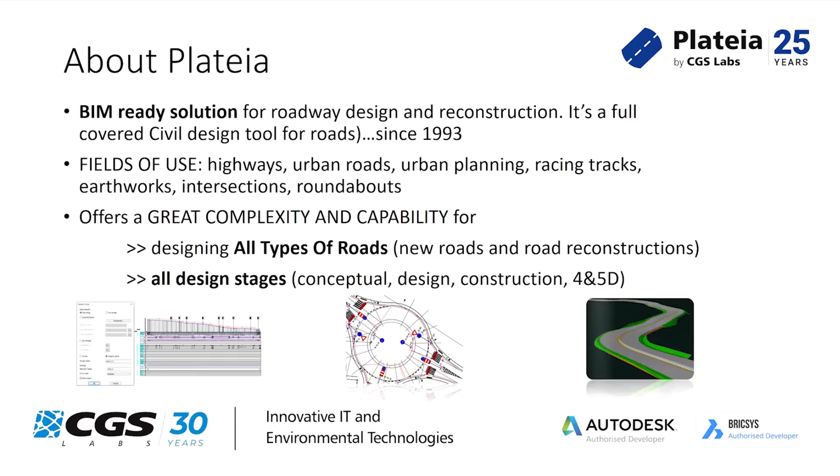So let's start with a technical presentation. At the beginning, I would like to show you a quick workflow with only 10 major steps that will take just around 9 minutes. Just sit back and enjoy.

So we see Plateia working in Civil 3D at the beginning. I will get some input data through Google Maps import. I've just selected some unknown area in Riga. I've never been there, so I don't know this area - this is just for the presentation. With a few clicks, using the right coordinate system, I got the right elevation points in my drawing and also the underlay image. So I will hide it for a second here.

In the next step, I go to layout. We define the axes that we will need here, named axis 0 and axis 1 - you will see why later. In the next step, I create the digital terrain model, which is the basis of all other steps. So with a few clicks, there is our terrain drawn here in the drawing.

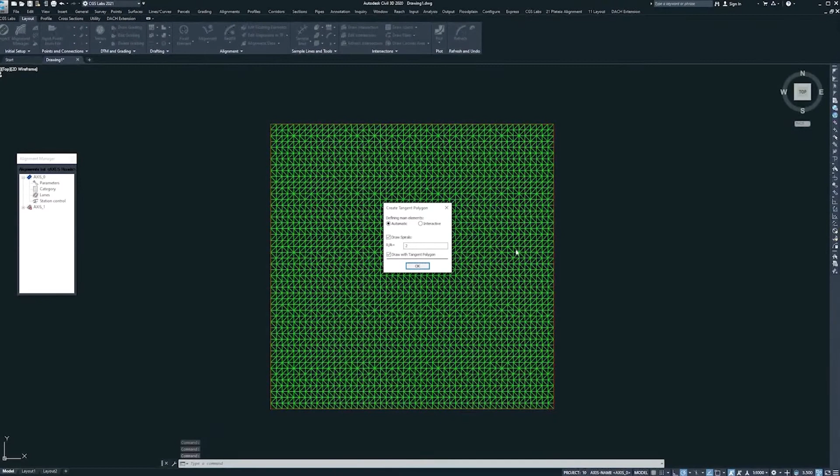So I go back and start drawing the alignment. You know those methods like tangent polygon, draw with stick, or best fit - it doesn't matter now. I select tangent polygon, but first I'll get my underlay back so you can see where it fits. So I start with the first axis, drawing it straight ahead through the first road.

The Plateia will calculate everything for me. I select the second axis, called axis 1. I go also for tangent polygon and draw a straight line through this street - I'm not sure how it's called, but you got the point. So now we have two axes here.

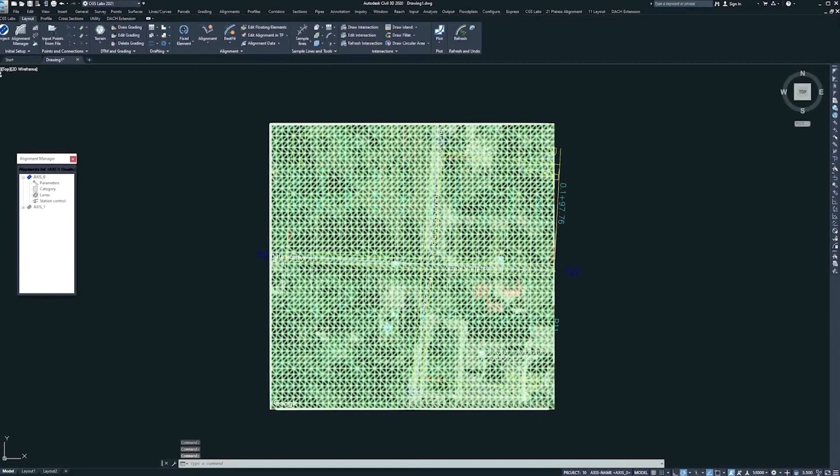I put also the sample lines which will define the later created cross sections on those lines. So for both axes I define sample lines. In the next step I drape them, so the sample lines are now in 3D, projected and draped into the DTM.

The next step is going to the profile section, which will define a table where I should define the tangent, the profile of the road. So just for example, I draw here a simple profile and calculate super elevations with a few clicks, and we got super elevations in the table.

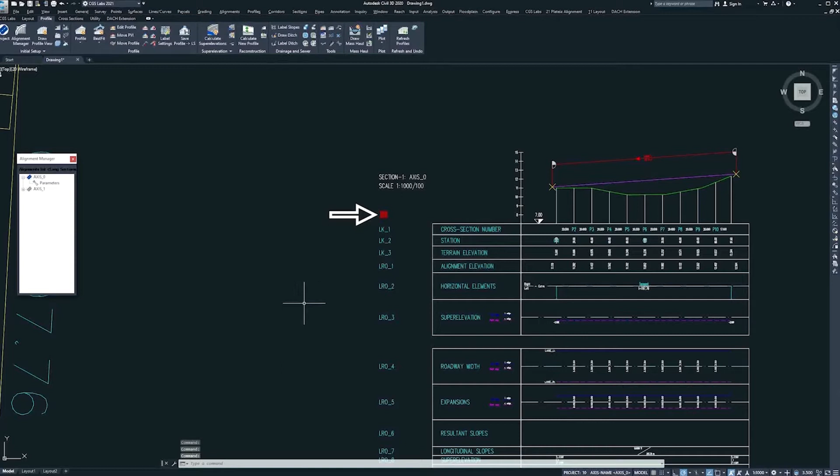I repeat this step for axis 1. I go to draw profile view, put it in my drawing, add the profile of the road - just a sample one like this - and calculate super elevations. So now I'm ready for the next step.

The next step would be defining cross sections. I have to first input the cross section tables like in the drawing, like here, but I'll put it a bit nicer, like for example here. And these are cross sections for axis 1.

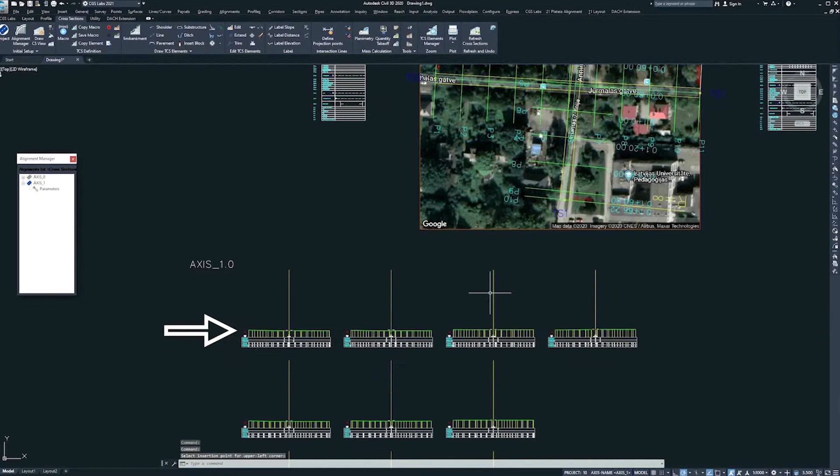You see, I have a table, I have drawn the terrain in the cross sections, and the lanes are also defined in the first step. I add here for the second axis. I select axis 1 and go for a powerful tool called macro.

That's like a subassembly library, which has predefined cross sections like here. With a few clicks, I got the geometry of the cross sections. But now I also need to define materials.

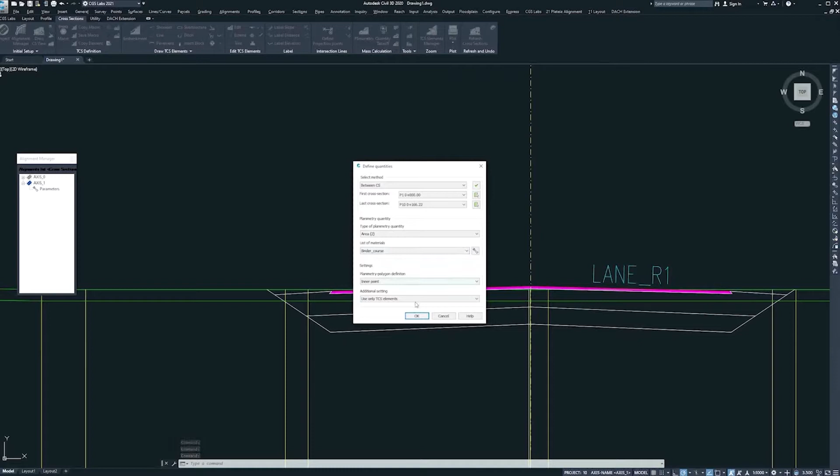So like this, it's very simple, similar to a hatch, but it's not - it's an intelligent hatch because it has some data behind it. So I define the layers of the pavement like this. I repeat once more, and the lower layer would be like base, for example, with some different method.

And like this, it's simple. I just select the edges I want to hatch. I want to define materials here. So like this - with a few clicks, I've defined the cross-sections geometry.

And I will have to repeat this for the second axis. I go for macro, which is like a script with predefined cross-sections. So I selected the same type of cross-section, and now I will repeat the steps I did before. So I have to define all materials in the cross-section.

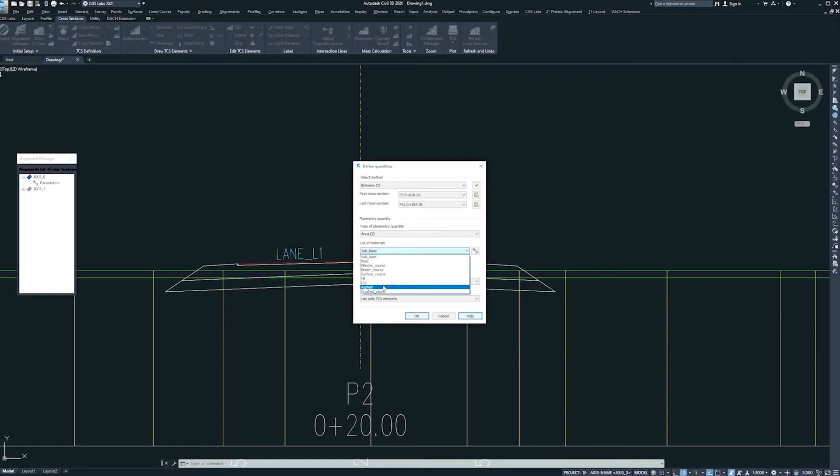I go for asphalt. I select the top edge of this asphalt, which are the lanes. The second layer would be the binder course - this is under the asphalt, the second layer - and the last one would be the base. So I go through the same procedure. I'll show the program which edges are my layer of the base, like here.

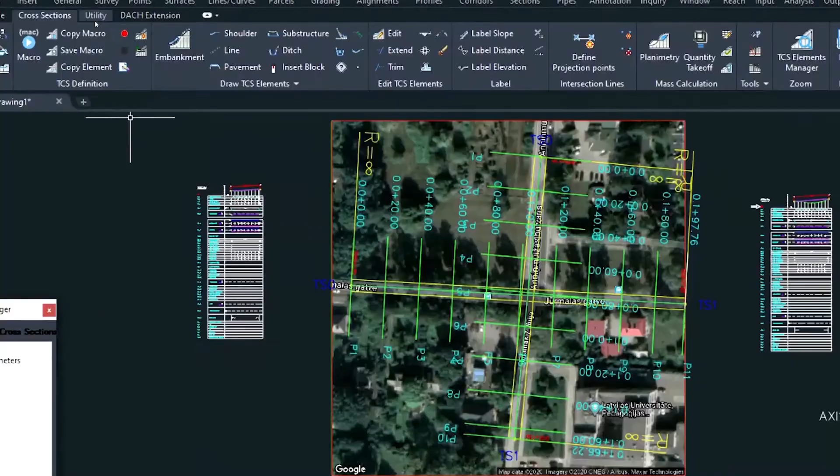And enter. So I've defined the cross sections for both axes, and the last step would be to create the BIM model just from the 2D geometry. As you saw, with a matter of one click, I got the first BIM model of the first axis, axis 0. And I will do the same for axis 1.

I click draw, and based on the predefined materials, the BIM model is created. But there's something strange, because there's no intersection between those axes.

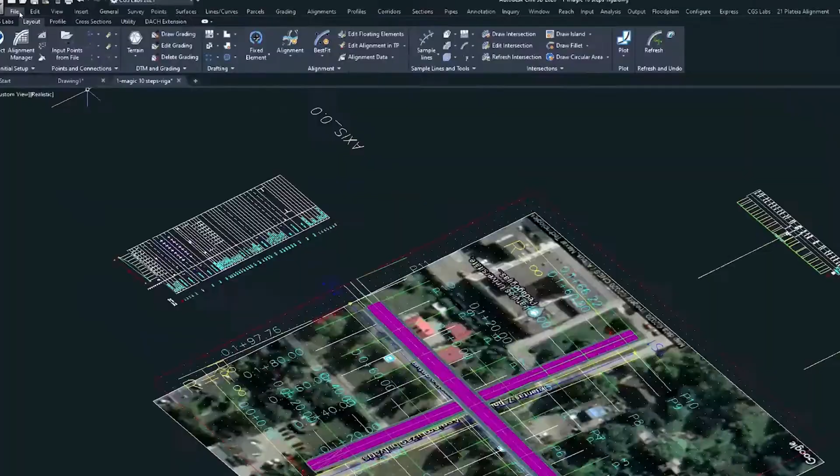So I will just hide this selection here and go back to the layout section. And there is a very beautiful command called draw intersection, which will automatically draw the intersection for us with a matter of a few clicks. I do some fine settings, not much, but I try to keep just the default as it is.

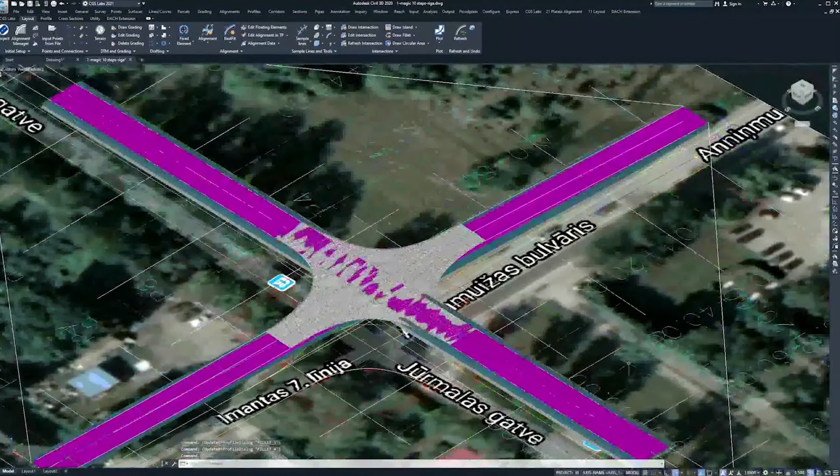And now I have to wait a few seconds while the program calculates and draws, as you see in the drawing, how everything is drawn automatically. So this is some very basic intersection created.

So I will hide this so you can see it better. So this is the whole geometry, the whole BIM geometry, the 3D model, which can then simply be exported when working on some collaboration with other designers, like on the BIM level.

So I will export everything from here. I select manually which objects should be exported into IFC - in my case, all the 3D solids of the roads and the intersections. So now let's see this in some external viewer, like BIM Vision.

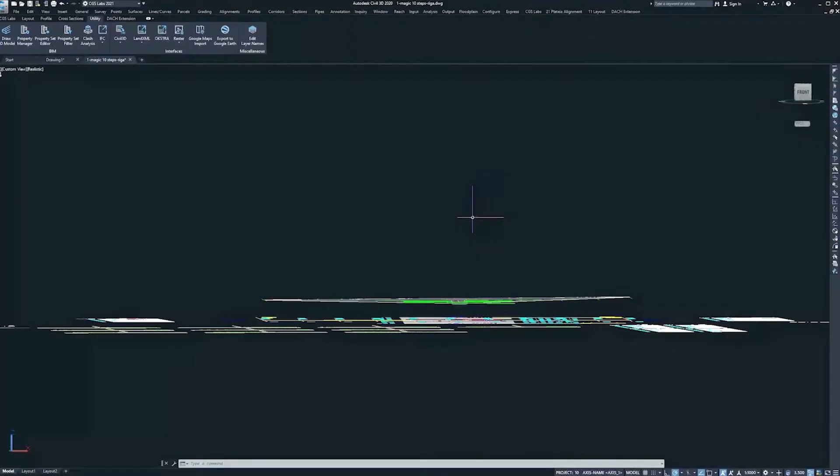BIM Vision is a free viewer for IFC. So here it is. That was the tenth step with a few detailed modifications.

Let's proceed and see a quick program structure. You saw that I went through layout, profile, cross sections, AutoSign, not here, AutoPad, not here, but through BIM also. Why not through AutoSign and AutoPad? They are standalone products that will be presented a bit later.

Here I want to share with you that we have the Plateia program divided into 3 packages. Plateia Standard will enable you to define the whole geometry with only 2D and also 3D level. Plateia Professional will add AutoSign, so you can design traffic signs and road markings. Plateia Ultimate will enable you to upgrade everything to BIM that you saw earlier, and also will add AutoPad as a standalone software, which is for swept path analysis.

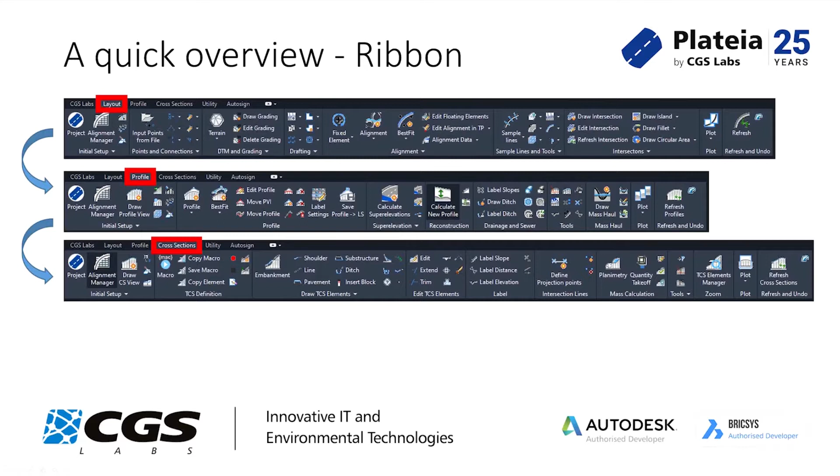Cross sections, you saw that it has a powerful command here. It's called draw macro. Macros are like predefined scripts for defining the geometry of the cross sections. So you can do everything manually from line to line, but you can also do it automatically. You define all the materials as you saw earlier.

And through defining all of those before, you can create your 3D model. You can export it through IFC. You can share it through the translator of Civil 3D, LandXML, OKSTRA, and you can also export it to Google Earth, which we'll show a bit later.

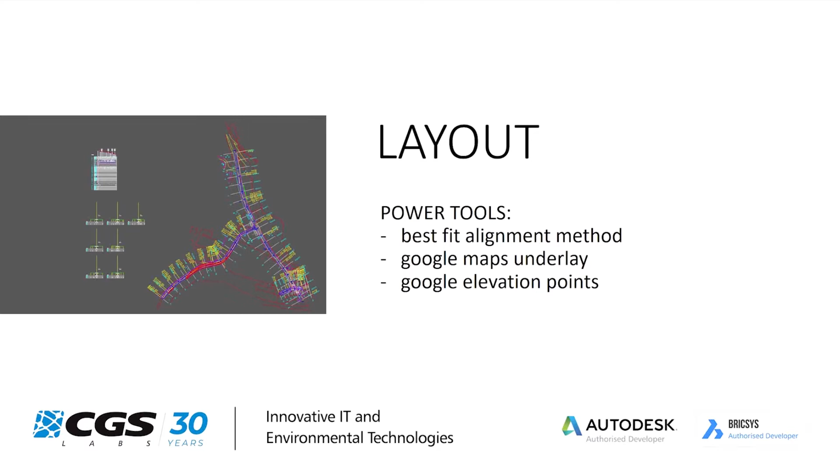Let's see some example here on a local road. We will see everything in more detail. We start with a layout with some powerful tools here in this section, like best fit alignment method, Google Maps underlay, Google elevation points, and so on.

So we start with the Project command here with the first command. We name it, for example, ENG. We click OK. We have all the data about the project here, and now we can start.

We need some input data like survey points. We have here some basic example, so I select the X, Y, Z example. We see the points are inserted here. I select a layer, naming it 0-survey, for example. Click OK, and the points are inserted in the drawing.

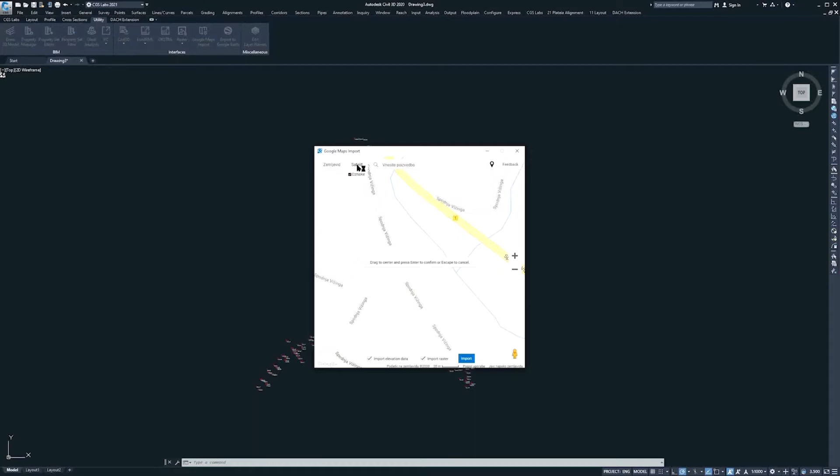But now we don't know where we are, so we need some underlay, which is very easy to get with the Google Maps Import command. I click on satellite, click find the location and the right coordinate system, which is in Slovenia in this case. I click back on satellite and get the orientation right. I deselect import elevation data because I don't need them, since I have survey data there. So I have my underlay here, which is very useful. I put it behind, send to back, and now we see all the points.

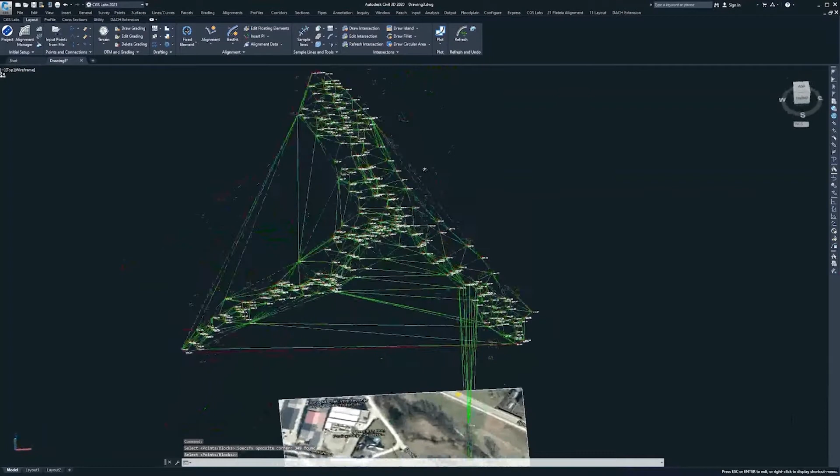In the next step, we have to create a digital terrain model, which is our underlay for defining alignments. So we name it test, select the input data, which are in this case those points we inserted earlier, and draw the triangle boundary. Okay, now here is our DTM. But we have some bad points there, so I will just deselect them in this case from the DTM. I click OK, and the DTM looks good in this case.

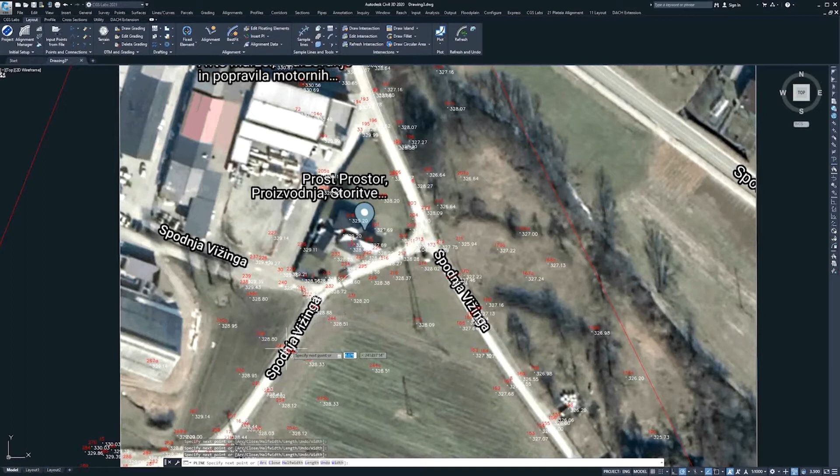Go on top, back. Now let's hide this DTM. We have points, and we have the underlay, and I will draw with a simple polyline my conceptual alignment that I will define later with our powerful tools.

Now we have the polyline. I will select the best fit method, so the alignment will be created based on the polyline that I drew earlier. But before that, I have to create the name of the axis, so this axis will have all the data stored inside this record here.

This axis has data about road function type, and based on those selections, the parameters and the standard behind it will be calculated later. So the horizontal elements will be based on those selections, based on which type of road we have. The best fit alignment method works very simply.

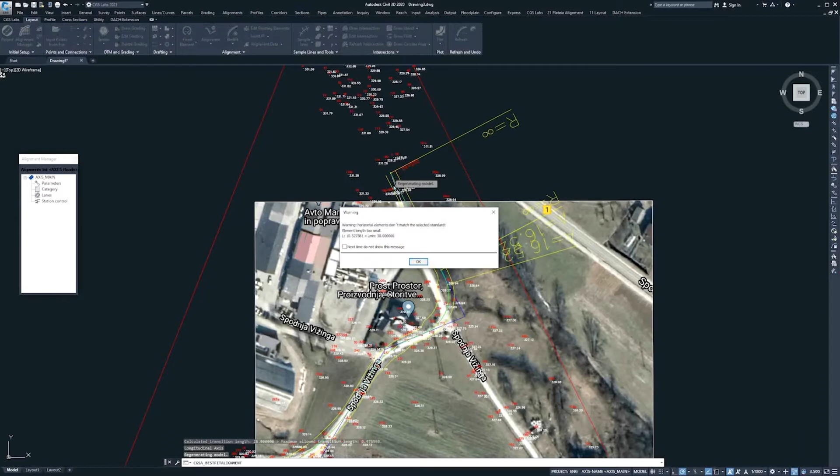We just select the polyline and click OK, and we have calculated the first result. With some modification we have a result like this. Here is our regression analysis result that will show you how the result complies with the input data that was the polyline. But I'm not satisfied with this result, so I will do everything from now manually.

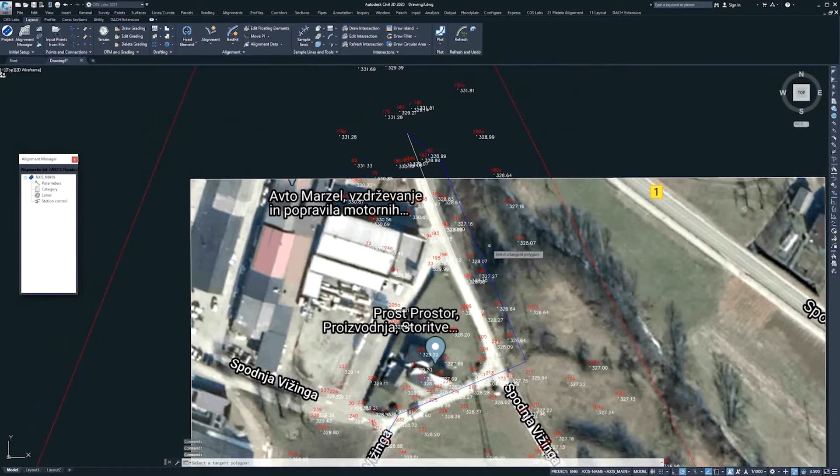I will insert a point in a tangent polygon and drag my alignment around so it will fit best to my expectations. Even that is not good, so let's do some more modifications. I repeat the command move PI and go a bit higher here. I click OK, now the high top is okay, looks good. I move the lower top, click OK, now we are very close to our expectation.

So the last step I think would be like here, like this. I click OK and it looks quite good, and it will fit for now, so we can proceed from here. So we've created the layout section and now we can proceed to profile.

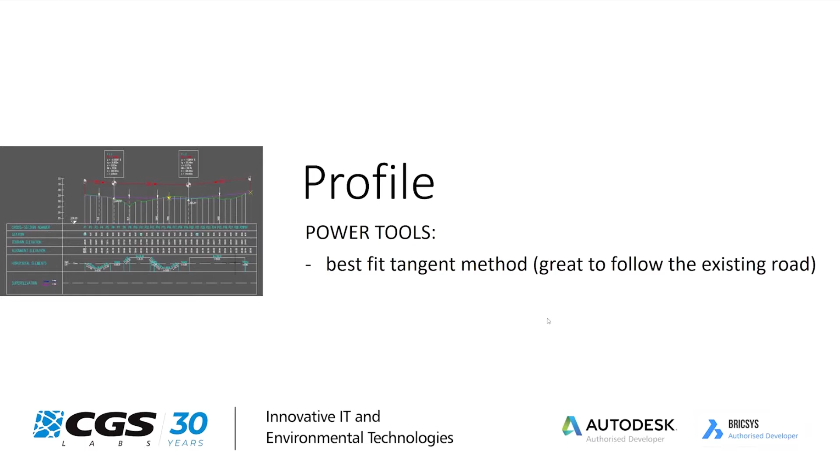The profile section enables you to use some powerful tools for defining the best fit tangent method, like here. It will fit perfectly to your existing terrain or the road, which is very useful when we are defining reconstruction. So let's see it. I select project, I select the same name project so we are working on the same project, and as you can see I'm working on a fresh drawing here.

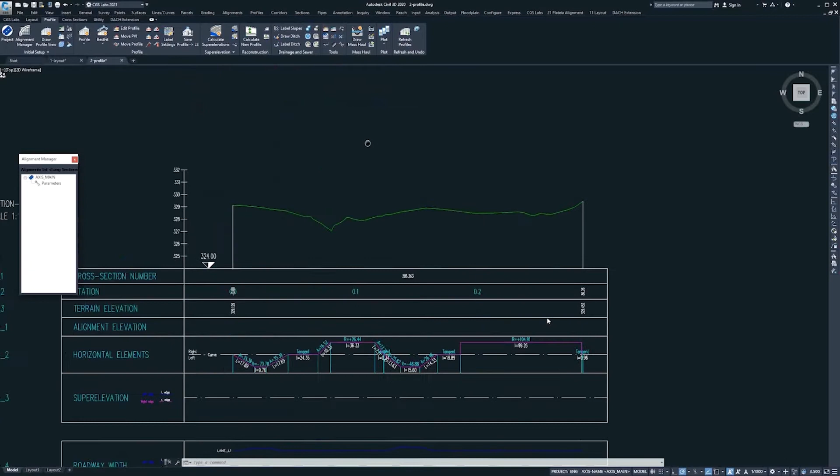That is very useful because designers are able to draw different sections of the project in different separate DWGs. We just connect everything through input data from, for example, layout, profile and cross sections, and through the name of the project. So my input data is layout here when I'm trying to define profile. The program will grab everything from layout, like here. I click OK, I define the point of insertion, and I got the table of the profile with all relevant data. You can see at the top also the existing or the created DTM.

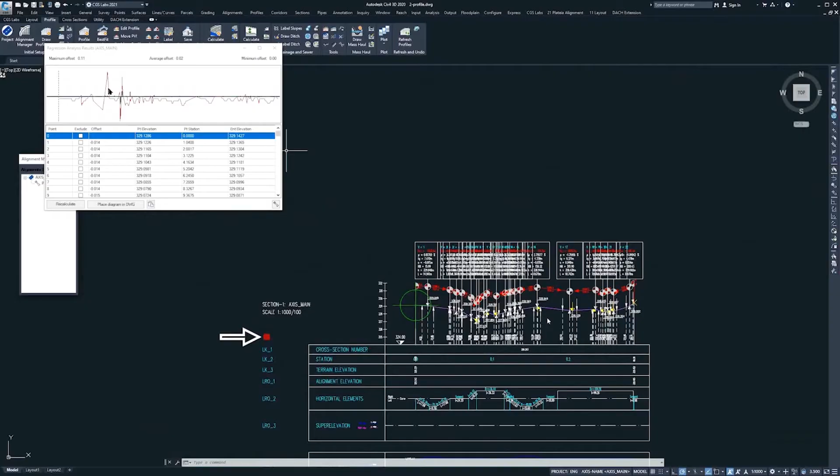So I will just define my best tangent. I can do it manually like here, like profile, but I will choose the best fit method, which goes with reconstructions because it will follow the line of the terrain the best, like here. It works very quickly, I have to wait a few seconds, and now I got it with the violet color. You see, this is my tangent of the road, and here on the left you see also the same regression analysis result that can show you how the offsets are working here - are they good or are they not?

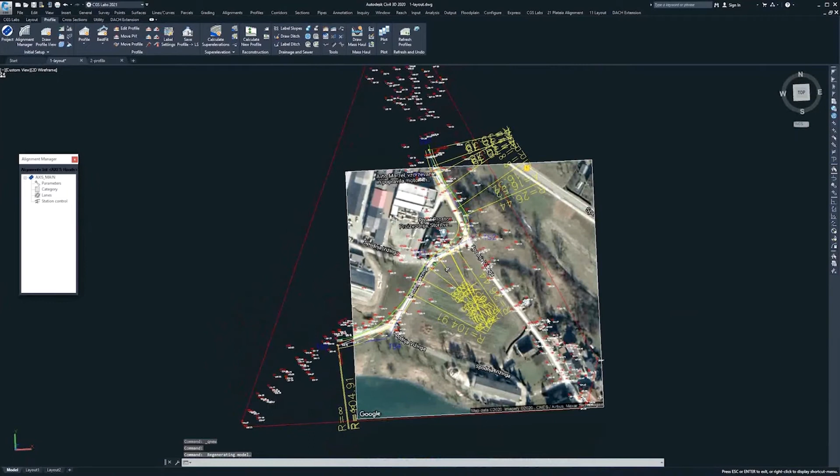So you can do everything manually, you can edit everything manually from here, but I think it's good for now. The next step, I will have to define super elevations, like here, with a matter of a click. So I go back to the layout. Now, once I have the tangent defined and I have calculated super elevations, I would like to see everything in 3D - that's some kind of logical.

So I go to layout, draw roads in 3D. What will happen is the lanes, the left, the right lane, and the axis will be translated into 3D. So I select the profile DWG - I always have to show the input data, which in this case is saved in the profile section. Now you see lanes and axes are drawn in 3D.

Cross sections will give us geometrical information about the parts of the roads, sliced parts of the roads. Powerful tools in the program Plateia are macro editing - those are called scripts, similar to sub-assemblies in Civil 3D. They are predefined libraries of roads, of the cross section of the road, so you can use them and they will create a cross section in a matter of a click. You have all other detailed editing tools also available, and the quantity takeoff.

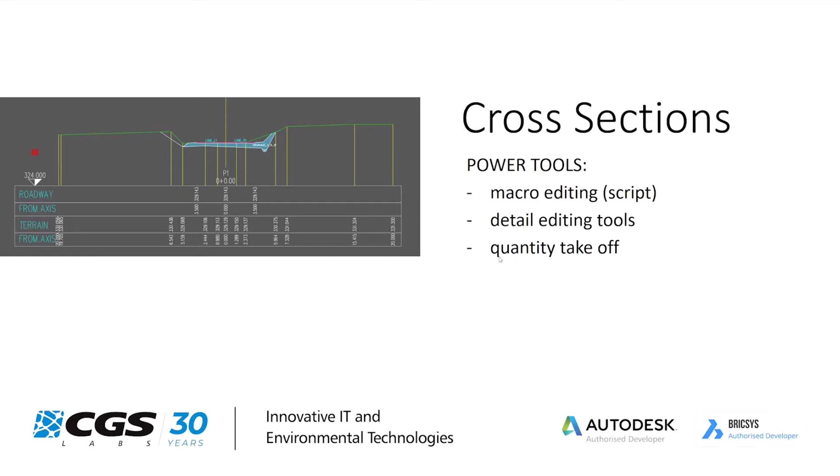So once you're done with your geometry, you can pull your quantities from this command here, and you will get everything written into an outside file or inside the drawing itself. So let's see how it works.

We are again in an empty drawing. I select the input data from profile and layout that has to be somewhere outside, and the program is then able to read everything from them. And here you go, we got the table of cross sections here.

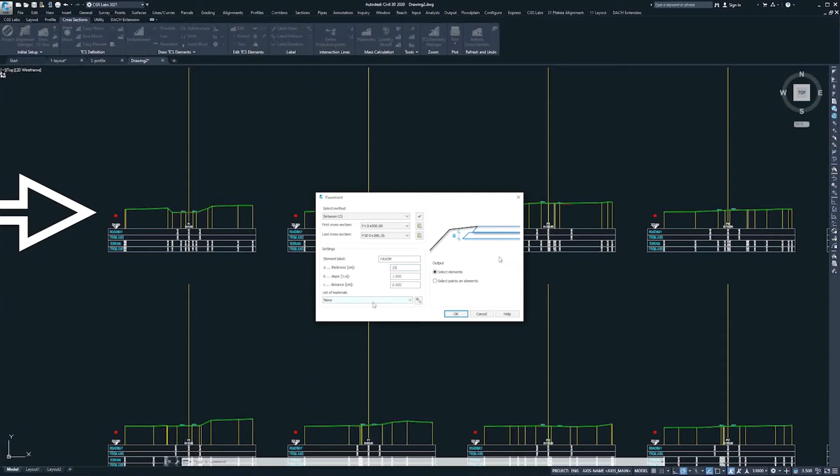So there is a table with terrain and lanes drawn inside. We can draw everything manually from every single line to the last one, but let's show some in between. We won't go with a predefined library, but we will define layers of the pavement separately.

At the beginning I will go with, for example, asphalt. I'll go with 5 centimeters and define this as asphalt as a material. I click OK, and I have to show the program where to put those materials under the lanes, and we have defined the width of the separate layer.

I repeat this command for the next layer, so I will go with binder. I go 15 centimeters, and I select the material, binder course. I click OK.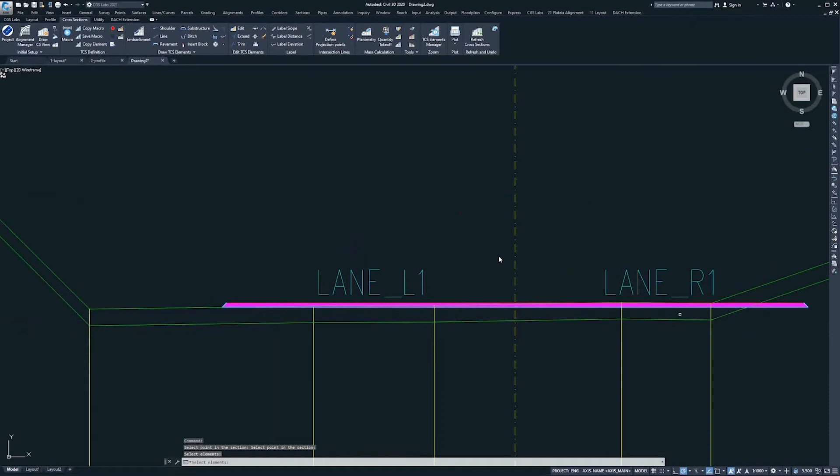I can select manually from which to which cross section I would like to edit this procedure. For now, I'm just editing only the first cross section. As you can see here, only the first one was edited. So only the asphalt is here, but I can select a random cross section, and I will tell the program to go through all cross sections.

I will show the lower edge where I should put a new layer, and you can see the program was now able to draw the layer under all cross sections in the table.

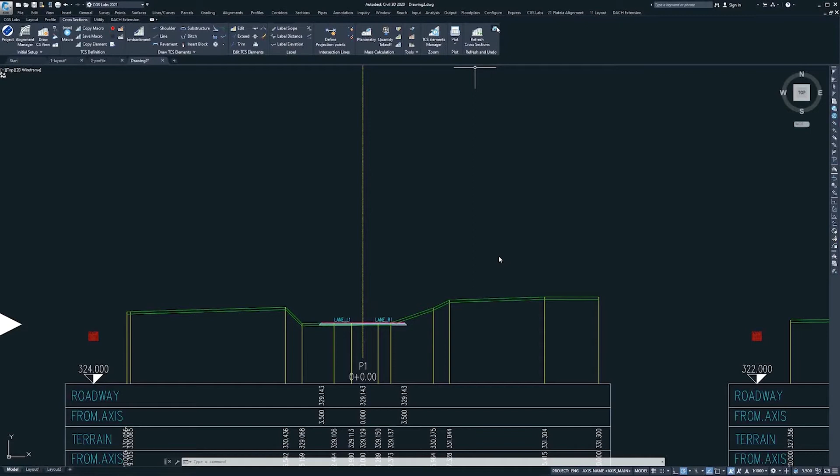I can go back, I will show you something else. We are now at the beginning. We have only lanes defined here, and I go for macro. These are predefined cross sections here. I select, for example, demo or TCS basics, and I will go through all cross sections.

I click OK, and in a matter of seconds we have defined all cross sections, with just one click, with one predefined library.

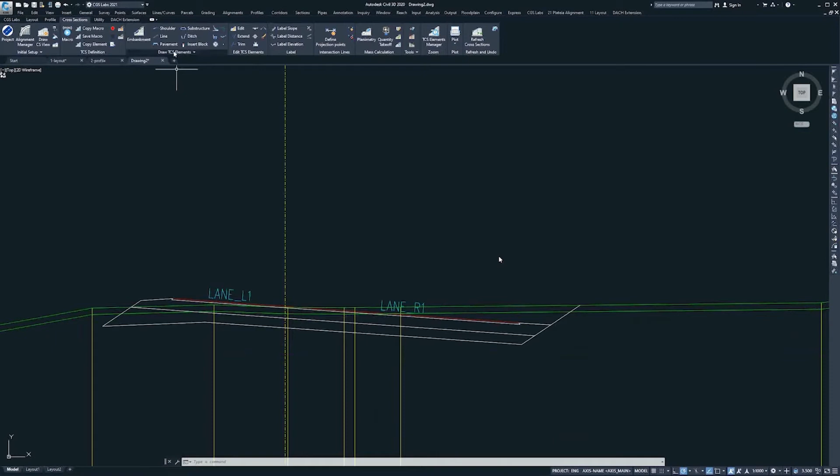The next step would be to define materials to this geometry. I can predefine the materials too, but here you can see I define the geometry separately from the materials. So in this step I'm defining materials to the first layer, the asphalt.

The next would be, for example, binder course. I go under asphalt and click, and I got the layer with binder course, and the last would be base. I can define everything with a different method, similar to hatch.

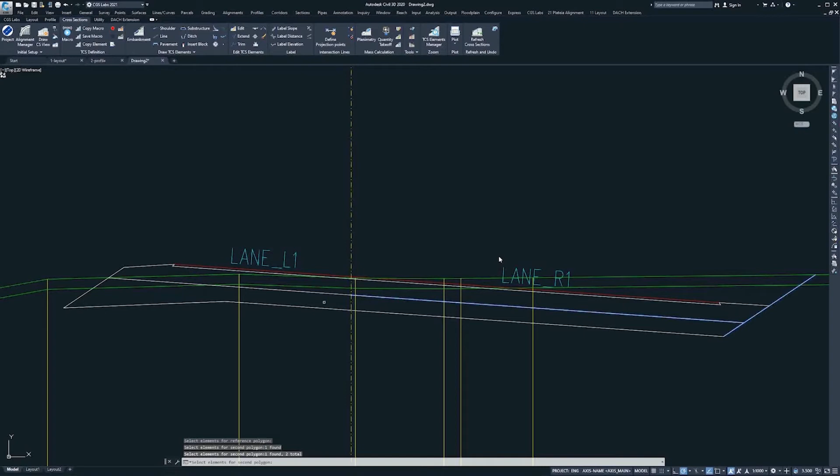We are working inside Civil 3D and you are familiar with all those AutoCAD functions. This looks very similar to hatch, but it's not. It's some kind of intelligent hatch that has other data saved behind it.

So I will save everything into a new file. I click, I will override this old file. Okay, I click yes.

Now we are prepared for the last step. I've created a new drawing. I set myself to the old project and I will draw a 3D model out of those previous data. I have to show the program where the layout is saved. Here, profile is here, and cross sections are in here. The program will automatically read from them which materials are defined and all the geometry from the files.

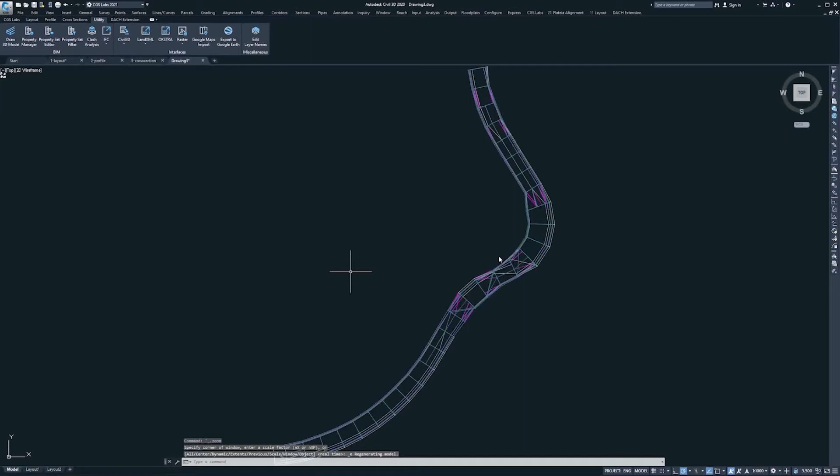I click OK, and now I got a 3D model here. That's a sample, a very basic sample, but it works like a charm. If I go to realistic look, you see even better how the materials and the layers are well defined here.

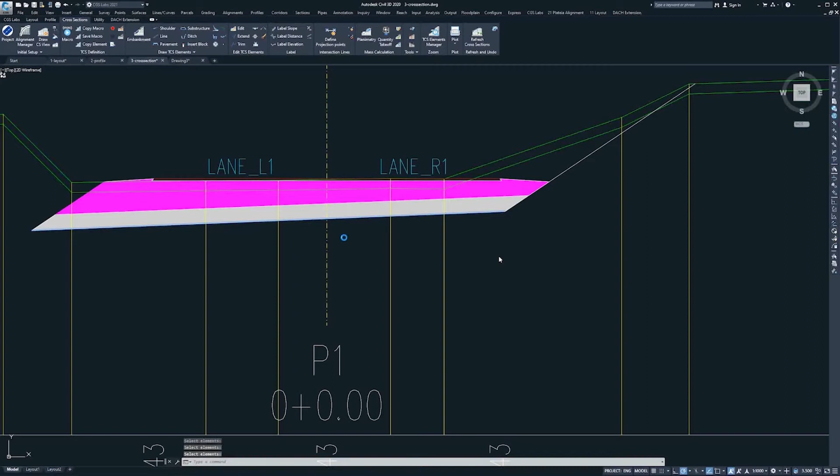So I would like to add a new layer. If I need to do this later, I can just go to cross sections. I will add some new layer, like fill for example, and select a new name, pavement 2, and add a layer under the existing layers like this. Now I have a new layer added.

I click save and go back to my 3D model drawing, and here nothing has happened yet. So I go to utility, I click draw 3D model. Once again, I select all the previous data. Now you see the fill is automatically added here, and I will not erase the entire model.

I will just add it, and you can see with just one click, I got this layer added here in my drawing. So my new 3D model has a new layer, and it's ready to be exported or anything else.

Speaking about BIM, Plateia enables you to use BIM tools like some kind of hybrid technology, because you can work everything the classic way, like 2D, 3D, and then upgrade everything into BIM if you need it. We have integrated powerful tools like Import IFC, which enables you to import everything from other projects saved in IFC into your drawing here in DWG.

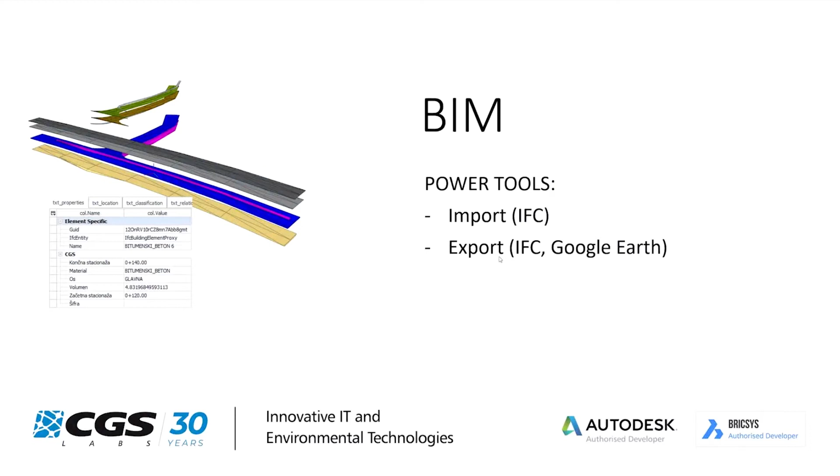Let's see how it works. This is the end version of the project that we've been working on earlier, so this would be the end model. If I go, this is the first stage, and this is the end stage. But I would like to show you how to share this information from the end version through IFC into my conceptual stage.

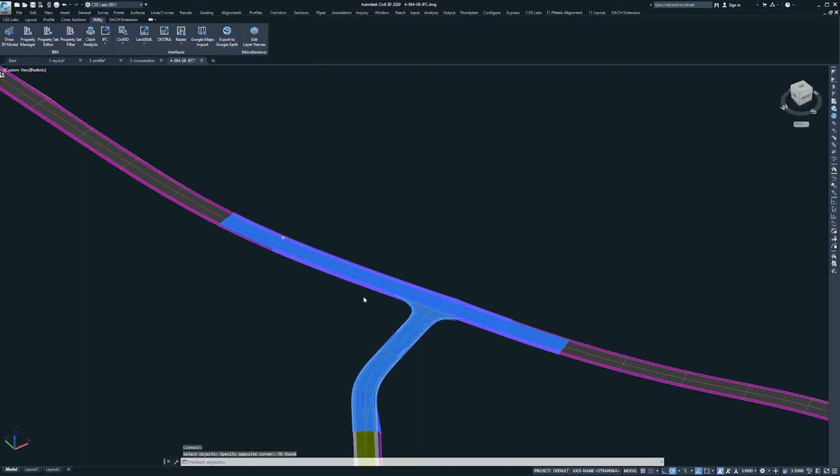I will save everything here to IFC, and I will just select some parts around the intersection. I would like to import that end version of the intersection into my first version into the layout. Look how this happens. I go to layout, and I will hide this object so you can see better. This is my first conceptual version.

You see I only have my alignment here, but now I go to IFC Import, and I will import that IFC that I've saved earlier, and you can see it right here now. So that intersection is now here in the shape of solids, so you can work with everything from here like normal objects. It's not like IFC anymore, they are like solids.

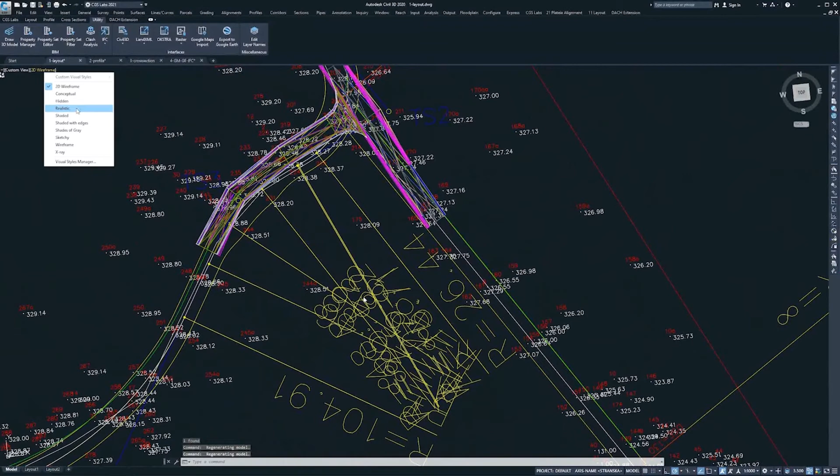So I think this is very useful when working with BIM and sharing information across your project and between your team members.

And just for the end, I would like to make some conclusions and point out some advantages of Plateia over the competition. Overall, we can say it has an industry-proven workflow which is straightforward and very easy to understand. That's why it's also fast to learn. It seamlessly integrates with your working process, and it's an all-in-one tool, meaning CAD and BIM tool in one. You don't need other plugins to design a road.

From a technical point of view, the shortest way has only 10 major steps to design a roadway geometry, as you saw at the beginning of my presentation today. It has integrated powerful functions like best fit alignment, best fit for tangents, intersections, and roundabouts. Traffic signs and markings are part of a standalone product called AutoSign that you will hear about later, and also swept path analysis, which is a standalone product called AutoPath that will be presented next.

Plateia has the possibility for manual cross-section detailing, so you can provide paper designs and plans to contractors, which is still very useful today. It has capabilities for data exchange with IFC, LandXML, Civil 3D, and others, which is very useful when working on the same project with different team members.

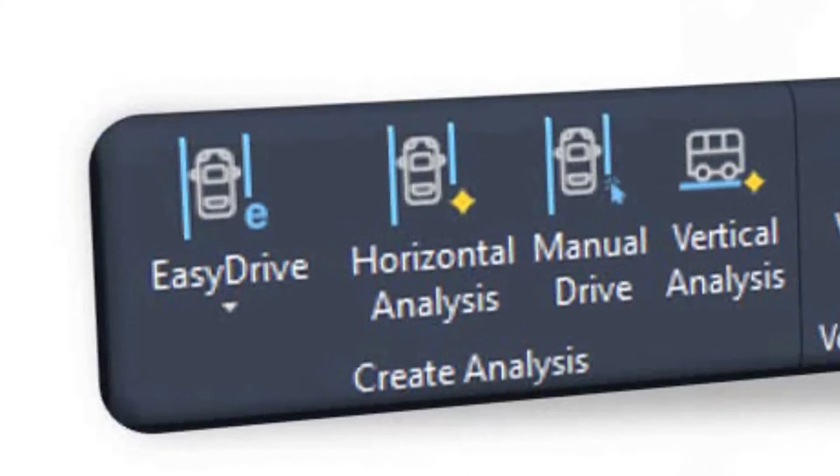You can select between a large number of vehicles included in the software. You can customize vehicles or design your own. You can customize the software by setting various general and advanced parameters. You can create animations and different reports for each created swept path analysis.

It allows you to import Google Maps data, getting started videos and software tutorials, support, access to updates and upgrades, and help documents, easily accessible through the AutoPath Ribbon. To make these features easier to imagine, let's look at some of them within a live demonstration of the software.

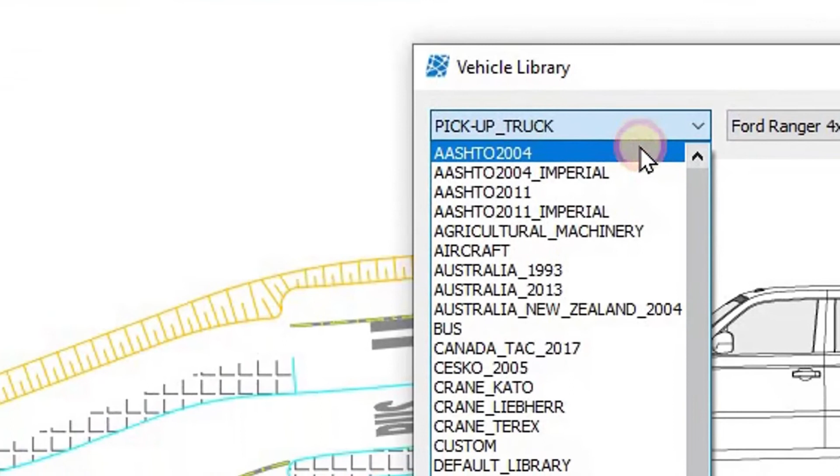To facilitate the swept path analysis process, AutoPath already includes a list of predefined country-specific vehicle design libraries like AASHTO for the United States, Canada, and Middle East, libraries for Australia, New Zealand, UK, Germany, and also libraries of specialized vehicles like emergency vehicles. With custom vehicle design options, users can extend these vehicle libraries or create completely new specific libraries of vehicles that are otherwise not included in the software.

AutoPath allows you to define a comprehensive set of vehicle parameters, enabling design from simple to highly complex specialized vehicles with multiple axles like forklifts, cranes, and so on.

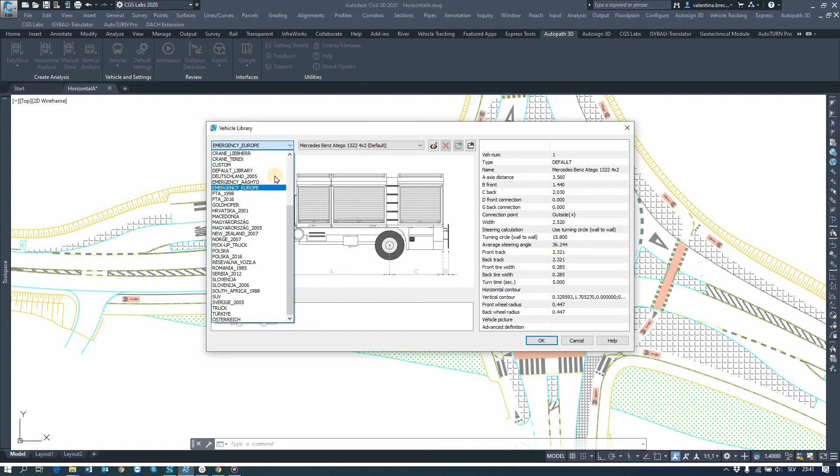To create a new vehicle, you can select the Add Vehicle icon on the ribbon, or simply edit a vehicle in the library you have chosen as your base vehicle. Enter the name of the new vehicle, then you can preview all parameters of your new vehicle and customize them.

You can simply add a specific load shape to an existing vehicle or vehicle trailer, set advanced vehicle definitions, and design the horizontal and vertical contour of the vehicle. When you are finished editing these definitions, click OK to confirm the new settings.

For creating horizontal and vertical swept path analysis, different methods are available: interactive, place adaptive, and manually guided.

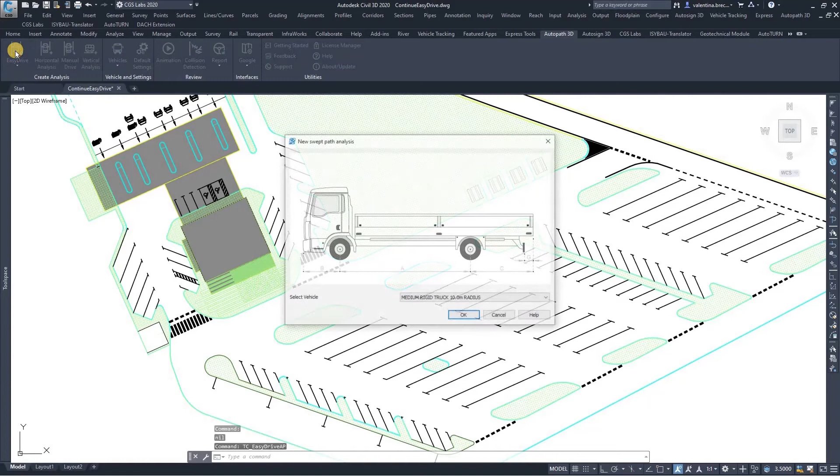EasyDrive is an interactive method for creating horizontal swept path analysis. After starting the command, you first choose the type of vehicle you want to use in the analysis. When the dialog box opens, you can define variables for speed, friction, super elevation, and minimum radius. In this dialog box, you can also check the parameters of the chosen vehicle, or change default settings for the current swept path analysis, for example, setting turn prediction on or off, selecting color, line type, and so on.

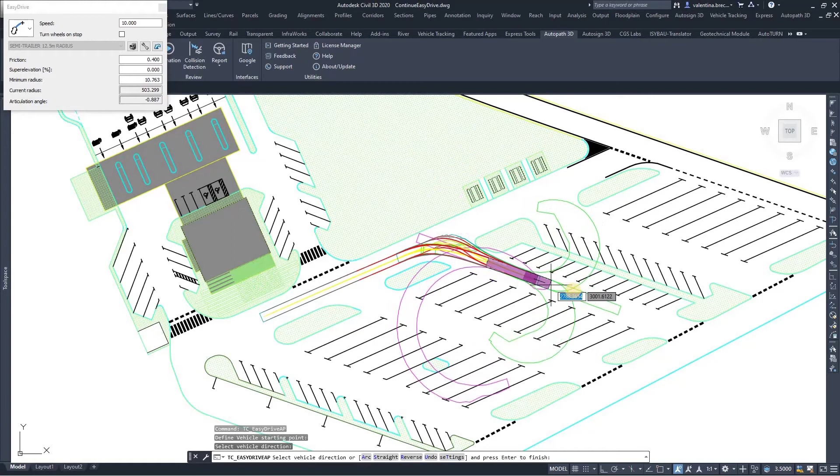After completing the settings in the EasyDrive dialog box, select the starting point and direction of the vehicle in your drawing. Then simply add points to the vehicle path by clicking on your drawing, which will create your interactive swept path analysis. Turn Predictions preview helps you see the next possible maneuver. As you can see, there are turn predictions in all directions available in AutoPath.

With the Horizontal Analysis feature, you can perform swept path analysis based on a selected line object. The New Swept Path Analysis dialog box opens, where you select the type of vehicle you want to use in the analysis. To create the vehicle analysis, press OK and then select a polyline, 3D polyline, or alignment defining a vehicle route in your drawing. The swept path analysis will be automatically applied to the line object.

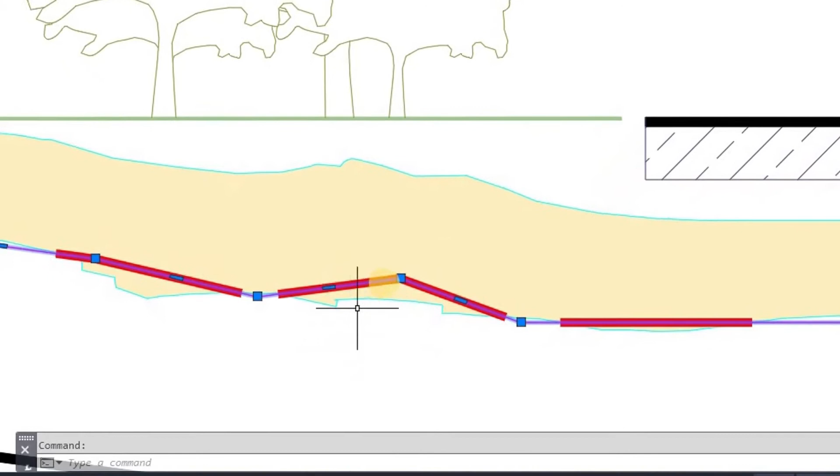You can do basically the same thing in the vertical direction. The Vertical Analysis feature allows you to check vertical vehicle movement, which can be very useful for evaluating transportability of road underpasses, garage entrances, and similar situations. AutoPath automatically creates a vertical path analysis, and in this case we can see that it has also immediately reported some ground conflicts. You can easily resolve conflicts by making adjustments in the design.

Since the vehicle route is defined as a polyline, 3D polyline, or alignment, you can simply edit the analysis by moving the grips of the line object. As you can see, the analysis updates automatically.

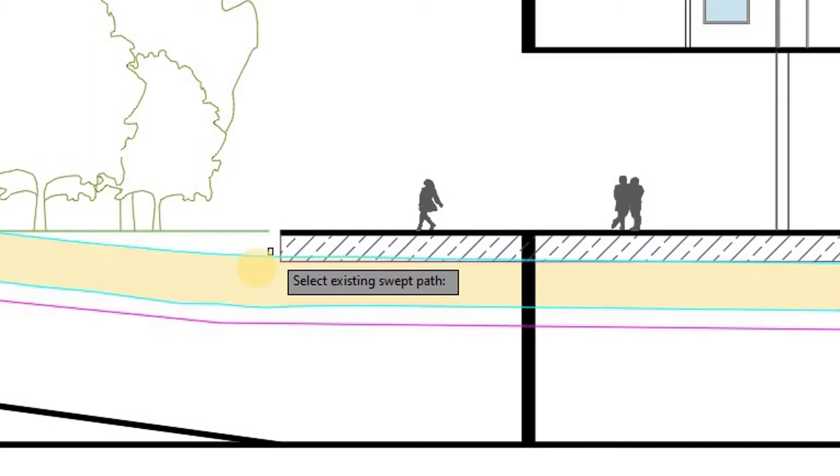If you want to detect the horizontal or vertical conflicts between the swept path analysis of your vehicle and surrounding infrastructure, you can also do it with the collision detection tool. You just select the object you want to verify possible clash points with, and then select your swept path analysis. The software will detect collisions and mark them.

When you identify potential obstacles, you can adjust the vehicle path through manipulation of points along the travel way to create a vehicle route without conflict points. After editing the swept path analysis, the collision detection will be refreshed dynamically and collision marks will disappear. In case you didn't manage to resolve all of the conflicts by editing your path, you can further visually inspect which part of the vehicle is colliding with the help of animation.

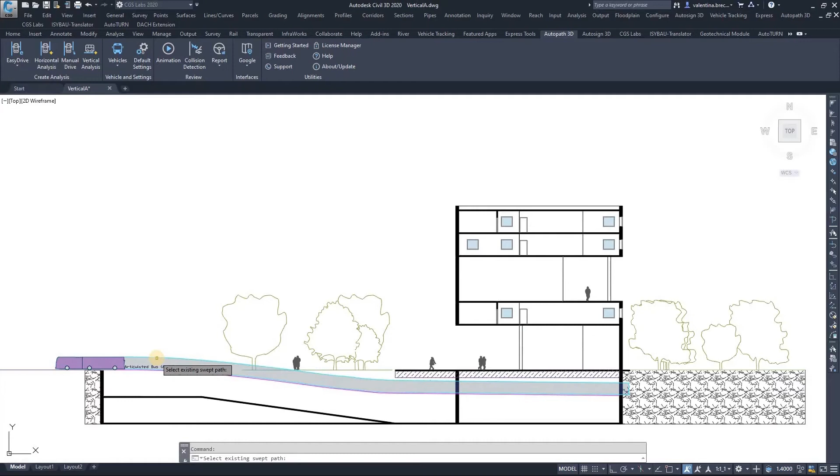You can animate any swept path analysis created with AutoPath. To run animation, click on the animation icon, select the swept path analysis you want to animate, and click the play button. In the dialog box, you have several options for controlling your animation.

With control buttons, you can pause or stop your animation. You define the speed of the vehicle at the beginning or change it later during the animation. During the animation, you can also draw the vehicle at its current step to see its accurate position at a specific moment, and there is also an option for drawing or deleting the entire vehicle trace. There are also options for settings of the vehicle path analysis and for showing the vehicle parameters within the animation dialog box. Animation can also be run by moving a control button on the vehicle's path left and right.

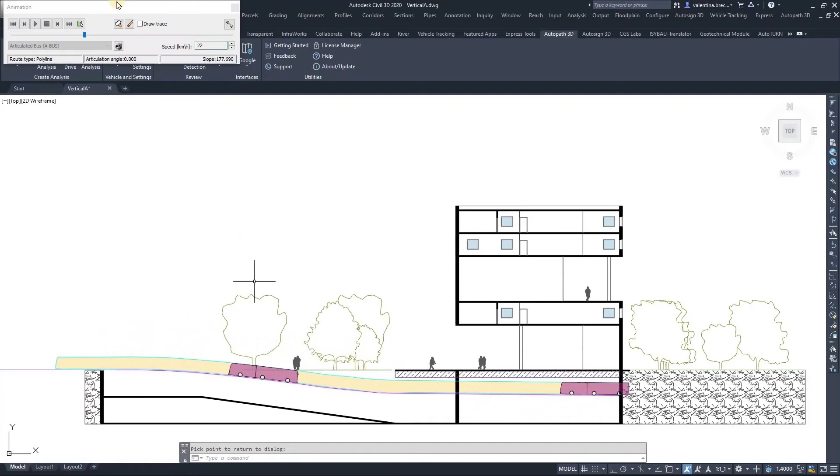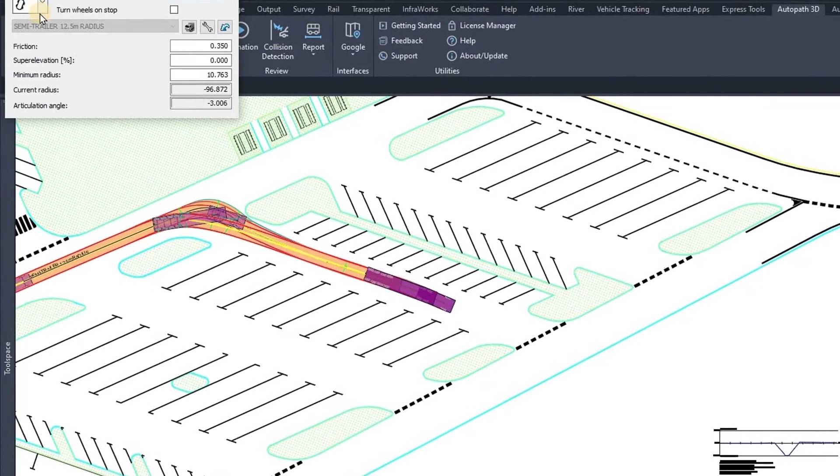AutoPath provides a range of swept path analysis reports, like horizontal and vertical vehicle contour and parameters display, collision detection, a width labeling option of the swept path for inspection of maximum values, and many others. The report command even enables you to insert a graph of the vehicle's turning angle into the drawing. And the best thing about this report is that it's dynamic—you can change your swept path analysis at any time, even after you created the turning angle report.

For example, when you want to resume an existing easy drive analysis, you can do this with Continue Easy Drive by choosing the swept path analysis you created before. Continue Easy Drive enables smooth continuation of the analysis. However, when adding new points, the route changes, and as you can see, so does the turning angle.

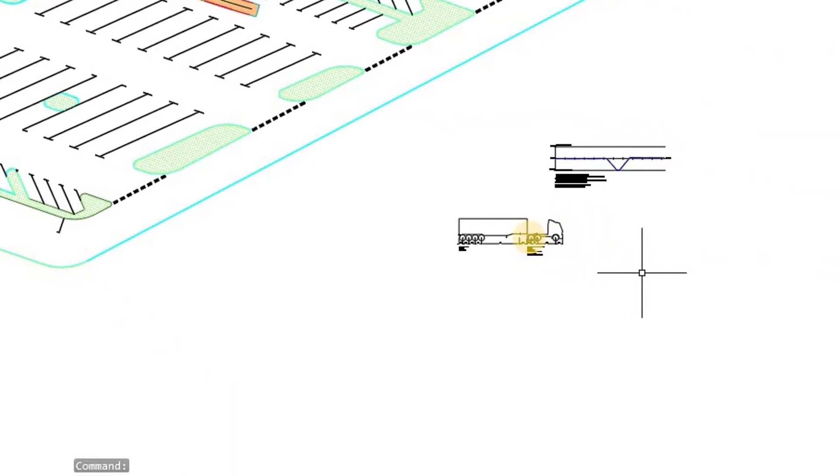Another thing you can equip your drawing with is the vehicle profile image and parameters. The command Vehicle Profile allows you to insert a selected vehicle profile in a drawing. After pressing the command, you just have to select the point in the drawing where the profile contour of the vehicle will be inserted. Below the profile is written the name of the vehicle, weight, front track, back track, average steering angle, turning time, turning circle curb to curb, and turning circle wall to wall.

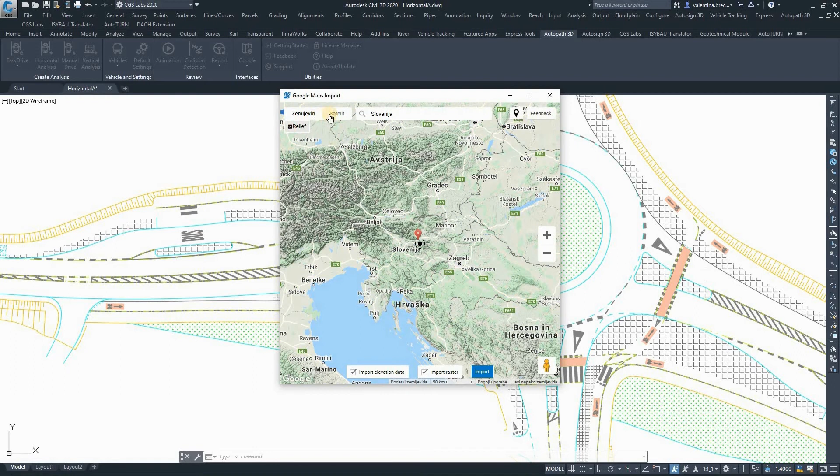With AutoPath, we have a feature that is not integrated in any of our competitors' products: Google Maps import. It provides unique raster imagery and elevation data insertion options, and street view capabilities within the CAD drawing, to help clients, investors, or the interested public visualize areas where swept path analyses are taking place.

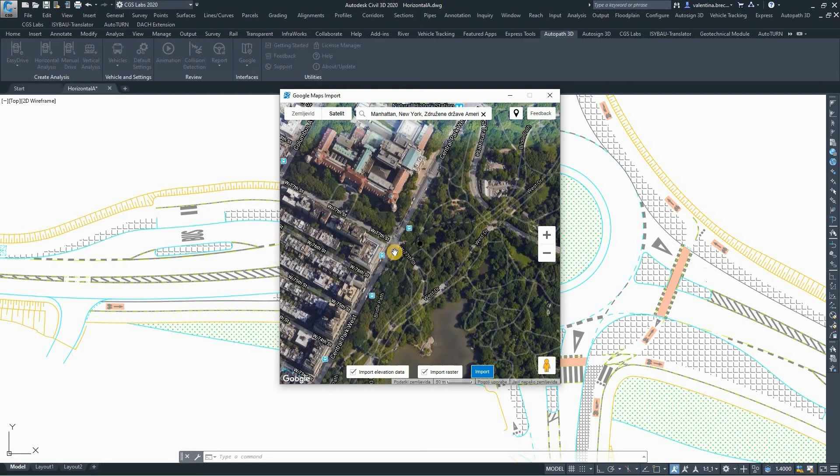You can import Google Maps raster and elevation data into a drawing with just a click. After selecting a location, adjust zoom to the desired area to be imported. Check whether you want to import raster data, elevation data, or both. After selecting Import, choose the appropriate country-specific coordinate system. AutoPath comes with an extensive list of supported coordinate systems worldwide to enable convenient data insertion. By clicking OK, data is seamlessly inserted into the drawing.

This feature can be very useful for special transportation planning, or in case you have to figure out how you will deliver a crane to a construction site—cases where you have to rely on existing infrastructure. But of course, you can also use it when designing your project from scratch.

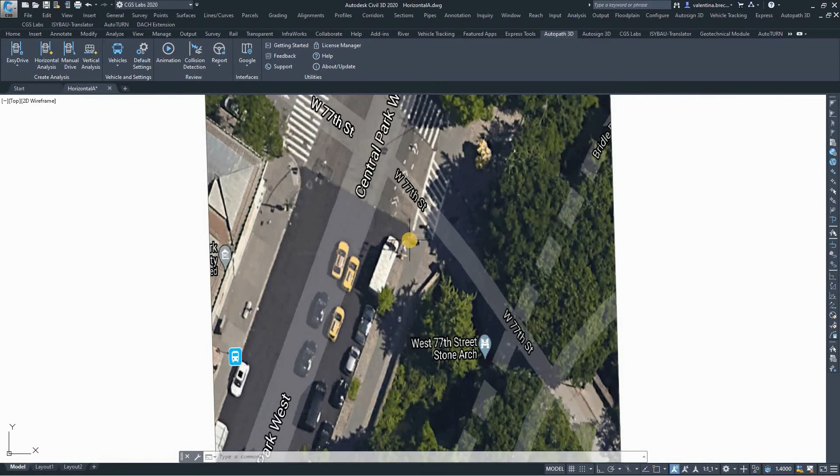For the end, let's summarize what we have learned in this session. The key advantages of AutoPath are integrated Google Maps import, especially useful for special transportation planning; dynamic reports that update automatically while editing the path; next maneuver previews available in all directions; support for designing your own vehicles, even with multiple trailers; and some other advantages presented in the technical part of the presentation.

AutoPath is also very easy to learn. Feedback from our customers shows it takes 15 minutes to 1 hour to figure out the designing workflow, and it's so easy to use that even non-engineers, or people without an engineering background, are able to design with it.

Those of you using AutoPath on top of Civil 3D who are familiar with Autodesk Vehicle Tracking or other similar software for creating swept path analysis may know that those products are a bit more complex to begin with, especially when it comes to creating customized vehicles. Another advantage of AutoPath is that it's available at no additional cost, since all vehicle libraries are included in every version.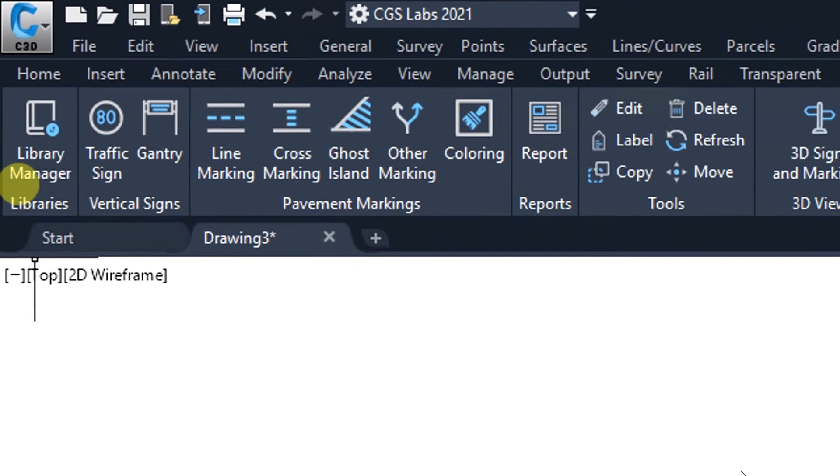Let's take an overview of the ribbon of AutoSign to see what it looks like. We have a library manager, then two commands on the vertical signs. We have the pavement markings, then the reports with extra order information, then we have a set of tools.

And up to here is AutoSign Professional. After this, we have the 3D functionality, the Google Import and Google Earth Export, the Bing functionality, and a set of utilities to improve your experience with AutoSign.

After the overview of the ribbon of AutoSign, let's get into the technical presentation. The first topic we are going to touch is traffic signs, one of the most basic and important functionalities of AutoSign. It mainly focuses on the insertion of traffic signs on the 2D design.

AutoSign has available several signaling packages based on national standards. Here I expose some of them, such as AASHTO, Slovenian, and German library, and we are developing much more, such as the Lithuanian one. It's important to say that we keep working on developing more and more national libraries.

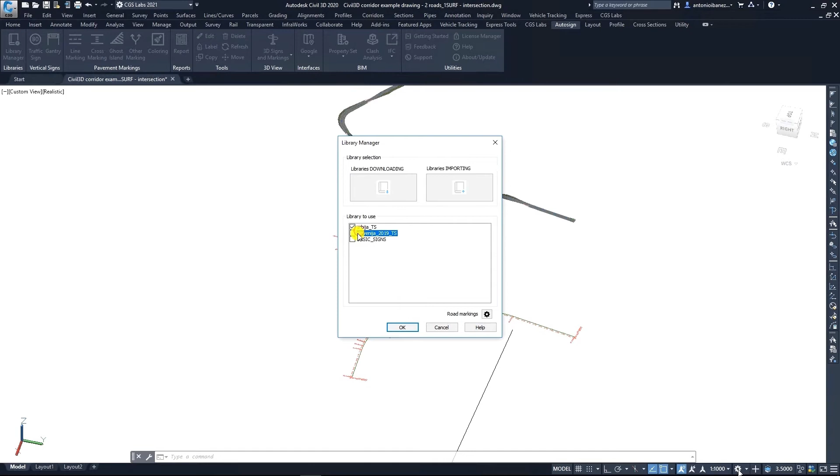Now we are going to click on the Slovenian one - this is the one we are going to use. By clicking on traffic sign, first thing we're going to do is select the Civil 3D alignment that we're going to attach the signs to. We're going to filter the names, and there are two ways of insertion.

The first one is, as you see, click on the drawing, and the second one is by inserting the station. So we're going to focus on the station. We input the station 160, then we input the offset, so the distance from the alignment, and the sign is automatically located at that point.

Now we are going to check some editable options of the gantries. We click on edit, select our gantry, and here we can change the geometry of it, and not only that but also the dimensions, as shown now. We shorten or enlarge the dimension, and it is automatically changed.

After the example of traffic signs, let's move to the pavement markings, the second topic. Let's see the possibilities for pavement markings of AutoSign.

The first one is longitudinal markings. We can draw the longitudinal markings over polylines or over alignments. We can easily set the beginning and end of the line. We can define the shape and dimension, even though the different libraries bring predefined dimensions and shapes, we can also customize them. And of course we can attach information labels to these markings.

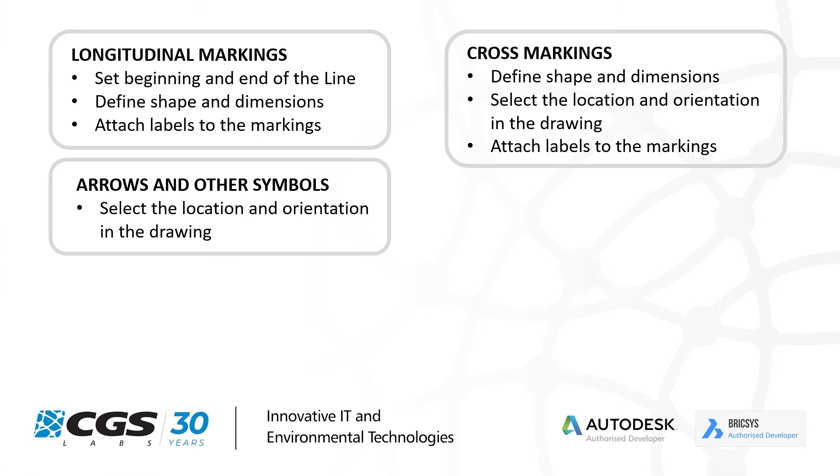The third type is arrows and other symbols. By other symbols we mean word and symbol markings, and we can always select the location and the orientation in our drawing easily. Then we have a new function, coloring.

By defining an area given by a closed polyline, by 2 edges, or by 4 points, we can color that area. We can set the color of the roadway of that certain area.

The fifth type are ghost islands. We can define the shape and the dimension, we can define the angle of these stripes of the ghost island, we can select the location and the orientation, and of course we can attach the labels to the markings. Now we're gonna check that in AutoSign.

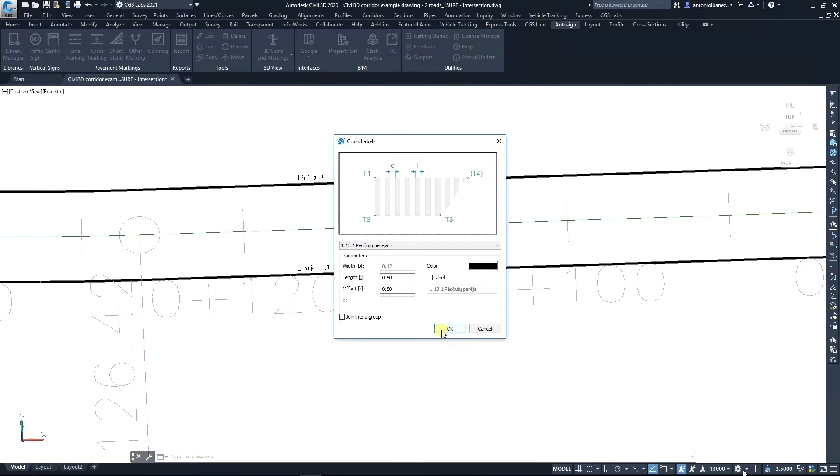So we return to our Civil 3D alignment example to focus on the pavement markings. First thing we're gonna do is click on cross markings. As we can see, we are working now with the Lithuanian library, and we're gonna select the pedestrian crossing and click on points 1, 2, 3, and 4 to set the boundary of the pedestrian crossing.

We're gonna click now on line markings to create a longitudinal marking. We select the type, we set the dimension, and click OK, and the longitudinal marking is created.

Now we're gonna edit. We're gonna show that AutoSign is not only for creating, but also you can manage the already inserted signs, as this one.

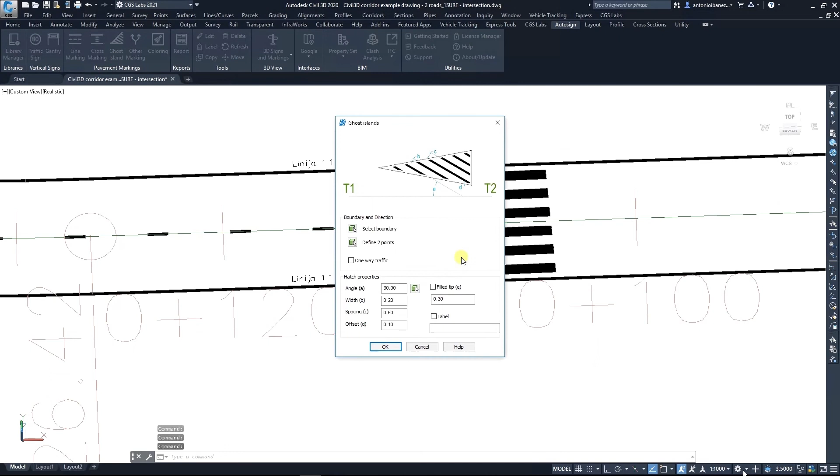Now we click on Ghost Island, and we show the different dimension options that it brings. We're gonna also include in our drawing an arrow. We simply click on the arrow that we want, and by clicking on the drawing it's inserted.

And the last command that we're gonna check is coloring area, where, as I explained before, there are different options to define that area.

Our next topic is reports. It's a very important function of AutoSign. It gives the possibility to generate traffic signs and road markings report tables. The reports include a detailed description of the quantities, especially for the pavement markings, with the length and the area of those markings.

The reports are not rigid, the tables are not rigid, they can easily be customized by the user. The user can add and remove columns as they want. And a very important feature, they are exportable to Excel, even the images, so the table reports can be completely exported to Excel.

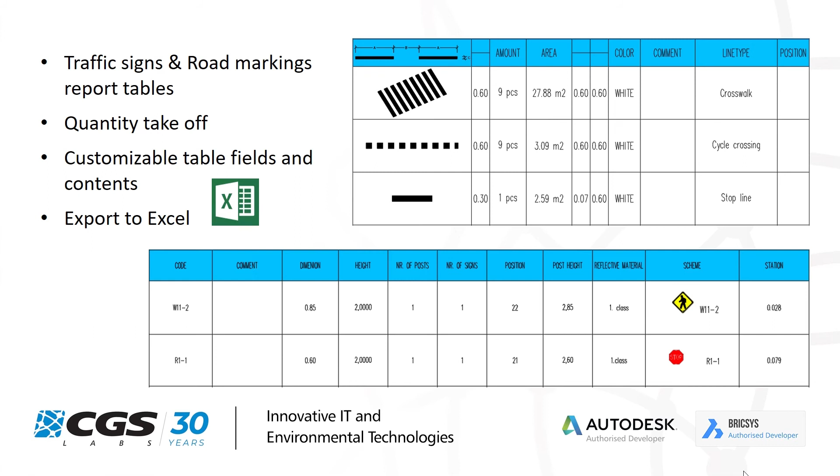So after explaining the main features, let's move to an example. Here we are working again on the Civil 3D alignment. We click on the command report. Here we can choose between the type of report we're gonna make. We can select the signs only from one alignment, and we generate our report of traffic signs.

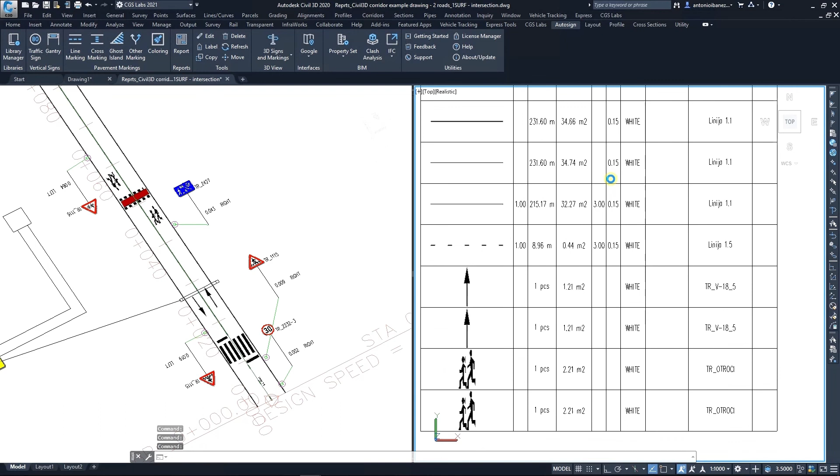And following the same procedure, we generate as well the one for road markings. We can see here the quantities, the area of each road marking, and as I previously said, a very important feature is that these reports are exportable in Excel, and this is an example, the Excel file of the previous report that we produced.

After reports, let's pass to the next topic, which is 3D view. As we mentioned before, this is an exclusive functionality of AutoSign Ultimate. How is the workflow? So we create with AutoSign the 2D design, and then by a click of a button, we create the 3D signs, the 3D solids of those traffic signs, pavement markings, and gantries.

This gives us one more advantage, which is that all our drawings will be compatible with other potential software, as for example Navisworks and InfraWorks. So let's move to the example.

This is the button to convert all those 2D signs into 3D signs. And here we select our corridor, in our case Civil 3D corridor. And by clicking OK, we will convert all those signs on our left hand side from 2D into 3D solids.

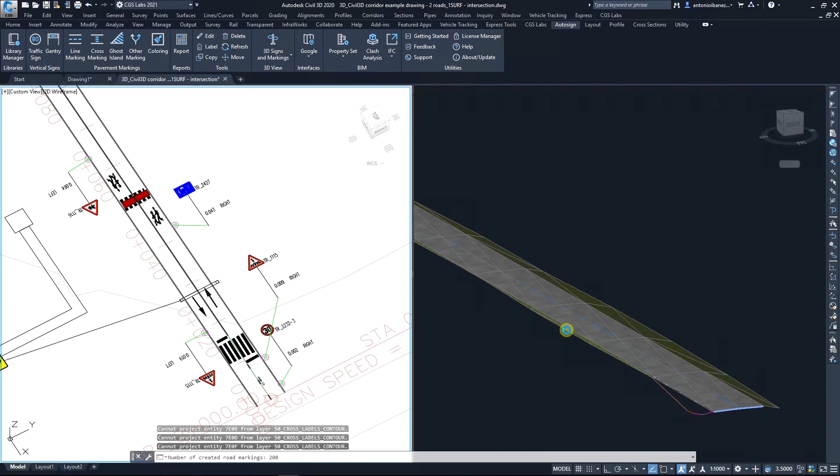Here we can see how the signs were created on the corridor. All of them are 3D solids, and this, as I said, gives us the advantage that all our drawings are compatible with Navisworks and InfraWorks.

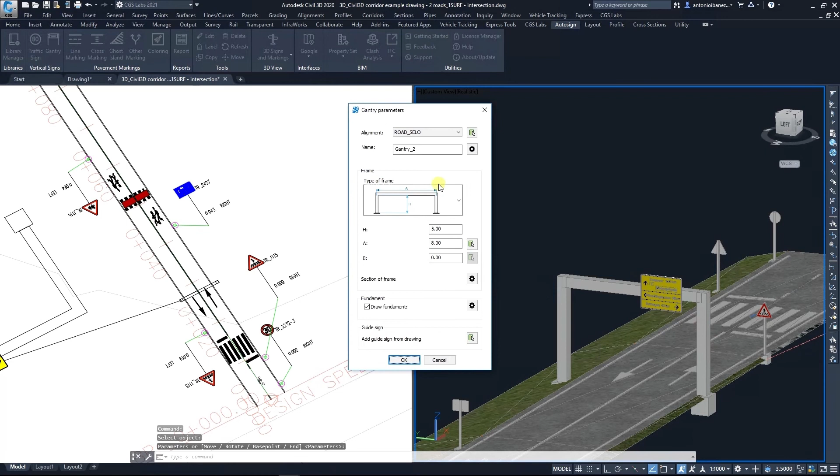The 3D of AutoSign is not only a nice picture to see, it can also be modified. This is very useful because, as we're showing now, we can modify signs by clicking on their 3D solids. We select a different geometry for this sign, and it will change in both our 3D view and our 2D view.

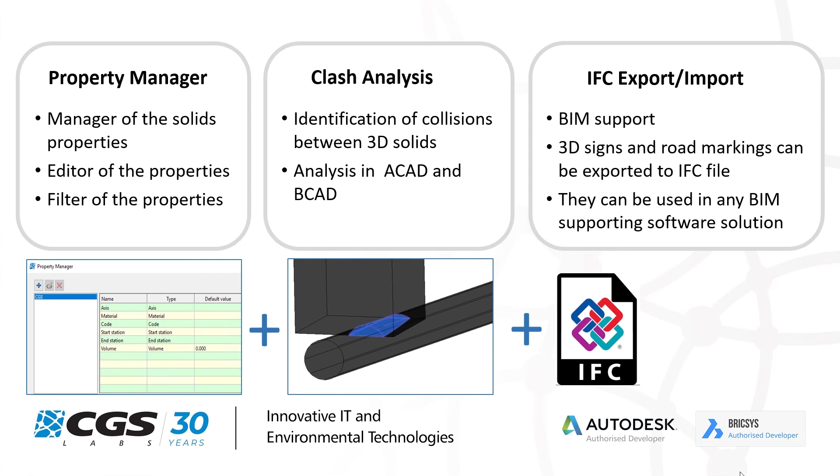Together with the 3D view functionality, we have BIM functionality. We managed to create 3D solids, but also had a function to set properties to those solids. We also have a command that identifies collisions between 3D solids in the CAD environment. And since we have 3D solids with properties, we're able to export them as IFC in order to support and be compatible with all BIM softwares. Let's check a practical example of this BIM functionality.

First, we're going to focus and mention that AutoSign also includes Google interfaces like AutoPath and Platea. For BIM, we have Property Manager, Set Editor, and Property Set Filter. But we're going to focus on clash analysis and show how it works.

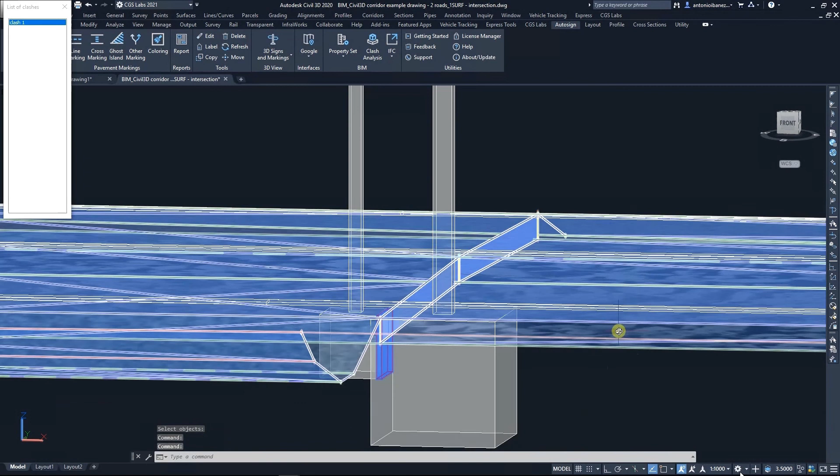First, we select one solid, then we select the other solid. It can be a multiple selection, and the program gives us a highlighted area. That means this is the area where both solids have a collision.

We also spoke about IFC export, and here is an example. Here we have a 3D sign. By clicking on IFC export, we select the sign and create an IFC file which can be easily opened in any BIM viewer.

The BIM functionality was our last topic, and now I would like to point out the main advantages of AutoSign. The first one: AutoSign is a product that can be used in many countries and on international projects, and this is given by the chance of being able to work with different libraries based on different national standards.

The second advantage: AutoSign is compatible with Civil 3D objects. The point that traffic signs, pavement markings, and reports are attached to the information given by the Civil 3D alignment makes AutoSign a very useful tool for Civil 3D users. Another advantage is that AutoSign is not only 2D planning, it can also create 3D views and 3D solids.

And this leads us to the last advantage. We have 3D solids, we attach properties, and we export to IFC. So we have BIM functionality and compatibility with many other BIM softwares.